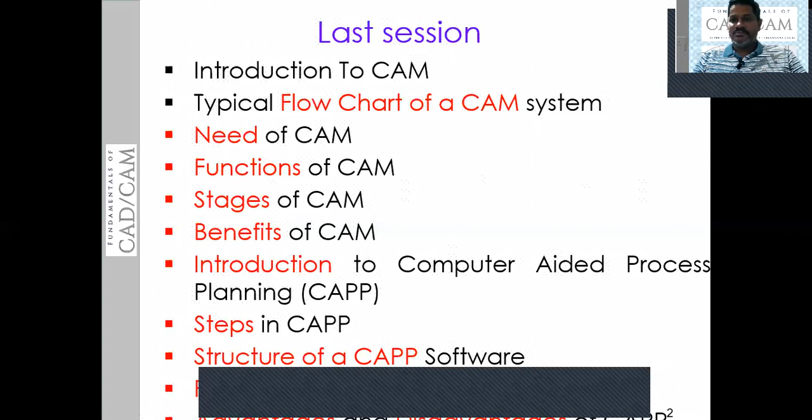In the last session, we have seen what exactly CAM is, a typical flowchart of CAM, then the need, function, stages, and benefits of CAM. Then we discussed the introduction to process planning. Then we have seen the steps and structure of computer-aided process planning software. Then we have seen the functions of computer-aided process planning. Finally, we had gone through the advantages and disadvantages of computer-aided process planning.

The objective of this slideshow is to discuss the integrated CAD/CAM organization, in which we will see the concept of CAD/CAM organization, integrated CAD/CAM organization. We will see the necessity of CAD/CAM integration in detail, point by point. Then we will move forward to see the computer integrated production system, in which we will discuss the concept, then PPC, production planning and control. Then we will discuss features and advantages of computer integrated production system.

Finally, we will discuss material requirement planning. In turn, you can call it MRP1, in which we will see the concept of MRP1, its objectives, and finally the advantages and disadvantages of MRP1.

Let us see the integrated CAD/CAM organization. This is actually a solution in which, when you integrate CAD and CAM, this solution is going to use the CAD data file as a front-end file. It is going to use the CAD data file directly where it is stored on the manufacturing side to automate the process. In turn, we can say that the CAD system is used as a front-end geometry engine to access the data to automate the manufacturing process.

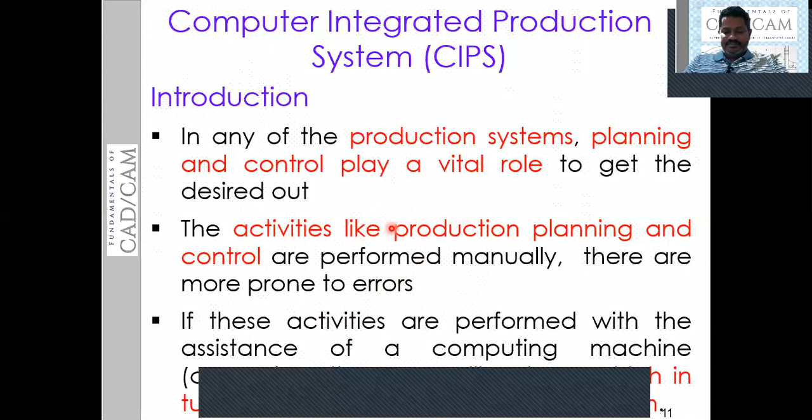When it comes to the definition of the computer integrated production system, CIPS: use of computer to integrate various functions of production planning and control, PPC, to reduce the problems faced in traditional PPC. In the case of traditional PPC, we are not going to use any computer. Every activity in industry is performed manually. That leads to many errors.

We will discuss this concept in the coming slides. As of now, try to remember, in the traditional PPC, the activities are performed manually. When the traditional PPC is connected to the computing machine, or the production planning and controlling activities are integrated to the computer, then we can call it a computer integrated production system.

Let me define this once again. Use of computer to integrate the various functions of the PPC to reduce problems faced while using traditional PPC is called computer integrated production systems. In short, you can call it CIPS.

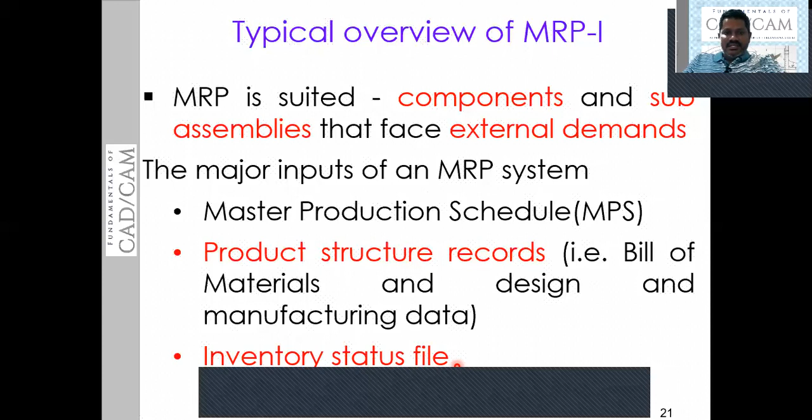The major inputs of the MRP system, as I said in the previous overview diagram, are three. One is MPS, master production schedule. The other one is product structure records: bill of materials, and design and manufacturing data. This product structure record carries the bill of materials and the design and manufacturing data. The inventory status file carries the details of the inventory. We will see a glimpse of these three in the coming slides.

When it comes to the master production schedule, this is going to plan for the individual commodities, individual sub-assemblies and sub-parts required to produce the final component. It is also going to link where, when, and how much of each product will be demanded. The master production schedule has all this information. This MPS becomes input to MRP1.

This is going to plan the individual commodities to be produced in each time period by using staffing and inventory. It is also linked to manufacturing: when to purchase, where to purchase, and how to purchase from the market.

Bill of materials, or the product structure, consists of this information. It lists the raw materials required. It lists the sub-assemblies required. It also has information such as the intermediate assemblies required. It also has information like subcomponents and the quantities of each needed to manufacture the final goods.

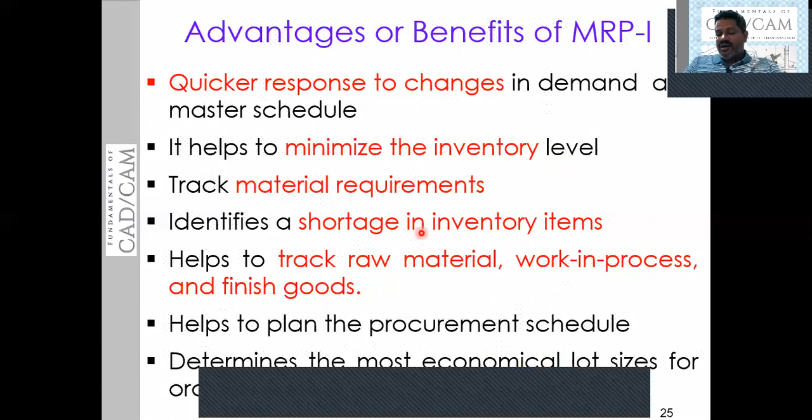MRP1 determines the most economical lot size for the order. That means MRP1 is going to determine the optimized economical quantity, or economical lot size, that needs to be ordered for the inventory to meet the demand of the market. This is also one advantage.

You have other advantages, that is, it is going to calculate the bill of material and the assemblies and sub-assemblies required. It also ensures the on-time delivery of the products, meaning the products will be delivered to the customer on time. Exact delivery dates are met with the help of MRP1. Customer service is very good and the response is very quick with the help of MRP1.

It also reduces setup, product damage, and product changeover cost, because it can quickly identify product change and setup change. So in turn, it is going to reduce the cost of the product. MRP1 also increases machine utilization, and in turn the production cost reduces. It also increases sales and reduces the sales price. The cost of the products reduces and sales increase. This is also one advantage.

When it comes to the limitations of MRP1, it does not address the financial status and the general accounting status. That means MRP1 has no link or concern with the financial side. It is not going to give us any financial data, and it is not going to receive any financial information. In turn, we can say that MRP1 is not at all linked with the financial status of the firm.

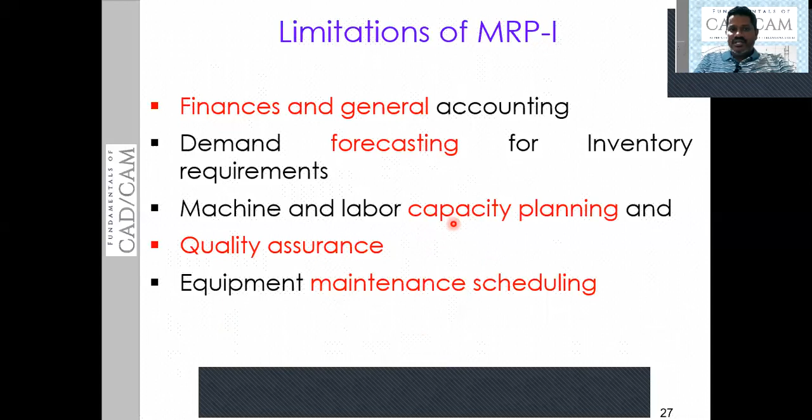Let me go back to the slides. What we have discussed as of now: the limitations of MRP1, advantages or the benefits of MRP1. We also discussed the overview of MRP1, what are the inputs and what are the outputs of MRP1.

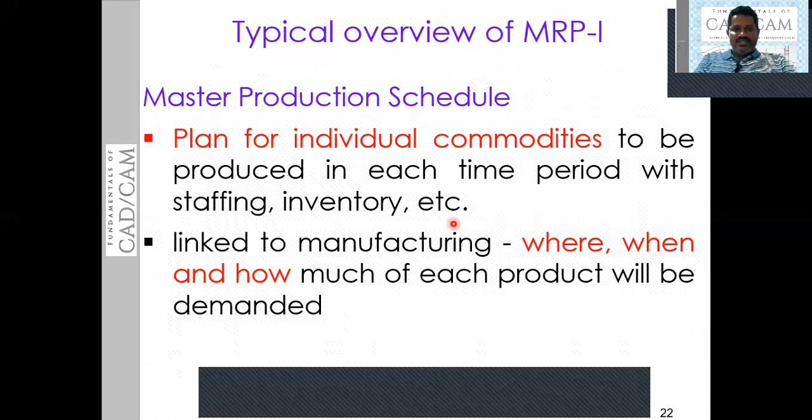As we have seen, MPS is one of the inputs to MRP1. Then bill of material is also one of the inputs to MRP1. Inventory status report is also one input to MRP1. When we give these three as inputs to MRP1, it gives us order release requirement, order rescheduling, and planned orders for the future. These three are the outputs of MRP1. It takes three inputs and it gives us three outputs.

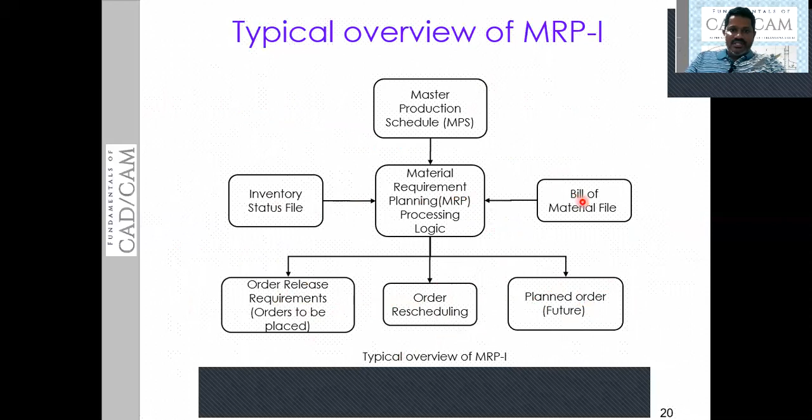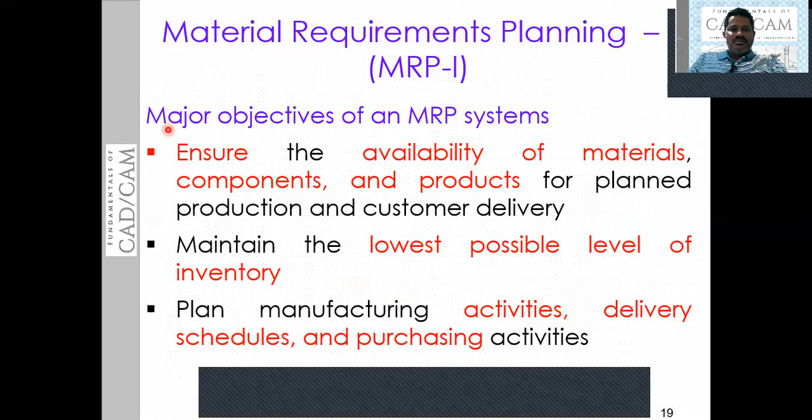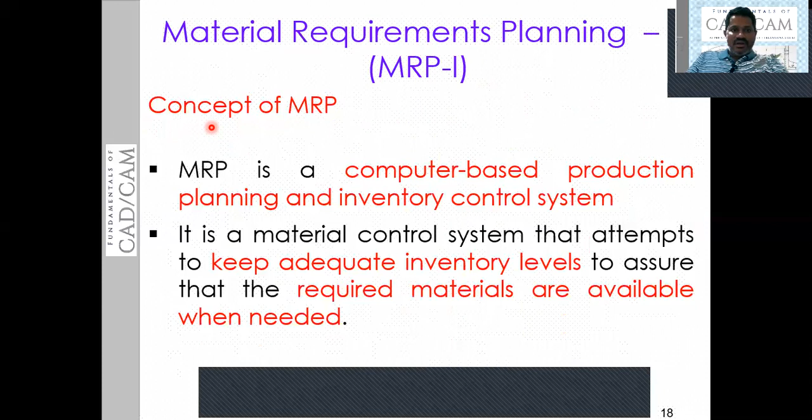Let me go back to see what we have discussed as of now. The major objectives of MRP1 also we have discussed. The concept we have seen, what exactly the concept of MRP1 is, on which concept this is going to work. We have also defined MRP1.

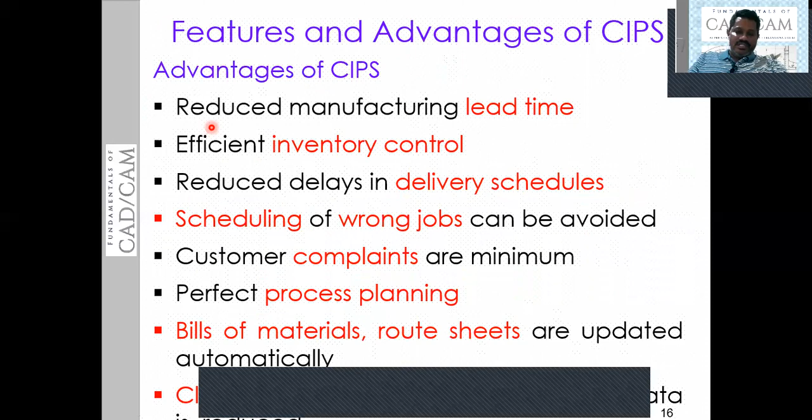We have seen the features and advantages of computer integrated production system, CIPS. We have seen advantages of CIPS, features and advantages of CIPS also we have discussed.

Then we have seen the problems with the traditional PPC, because CIPS is going to work or use the principle of PPC. The problems with the traditional PPC we have seen, and these problems can be overcome using a computing machine or a computer in computer integrated production system. When PPC is integrated with a computing machine or computer, in turn we can call that computer integrated production system.

We have some problems in PPC, traditional PPC, that is production planning and control. Traditional PPC is having some problems. Those can be overcome by using a computer. In turn, we can call that computer integrated production system, that is CIPS. So this we have discussed.

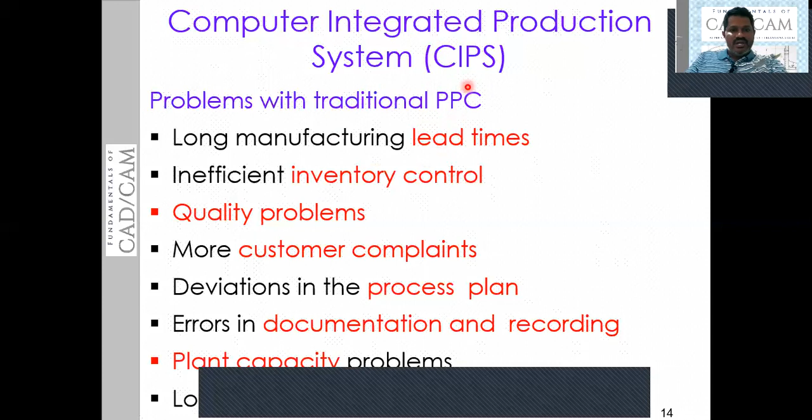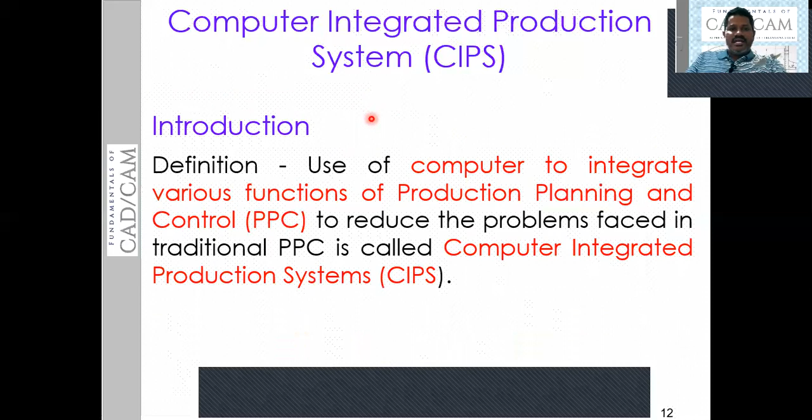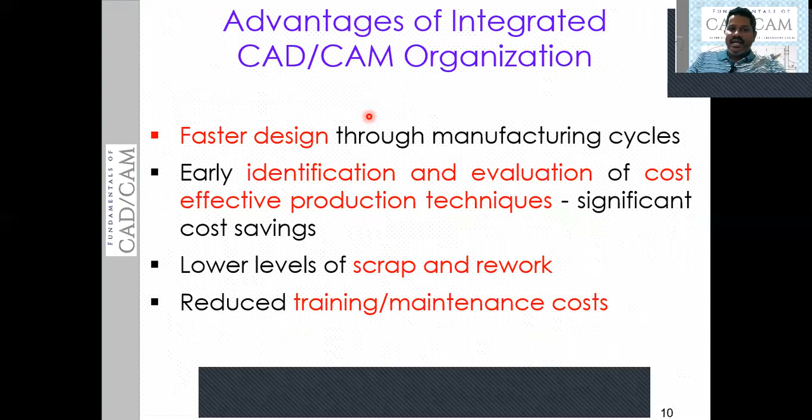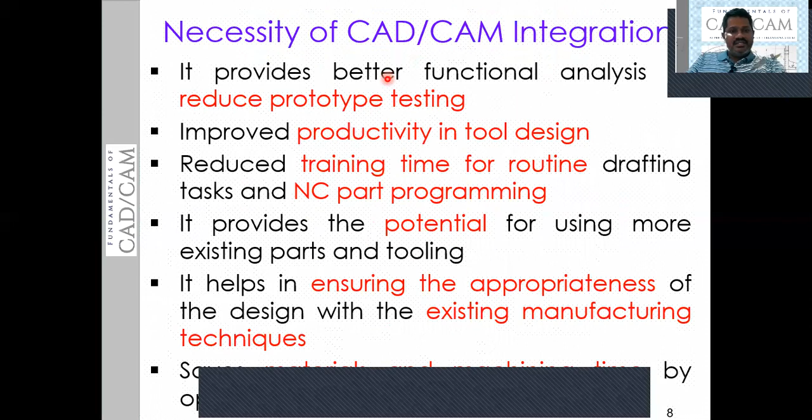Then we have seen the concept of PPC. Then we have also defined what exactly the definition of computer integrated production system is. We have seen the exact concept of CIPS. We have seen the advantages of integrated CAD-CAM organization. When you integrate CAD and CAM, the advantages we have seen in the last slide. Then we have seen the necessity of CAD-CAM integration, what exactly the need of CAD-CAM integration is.

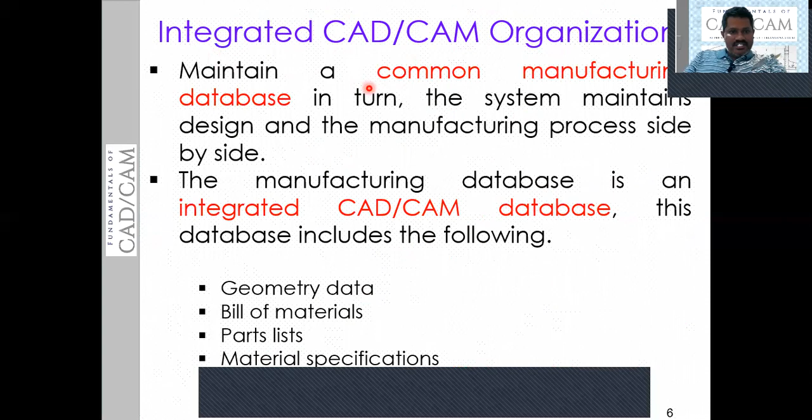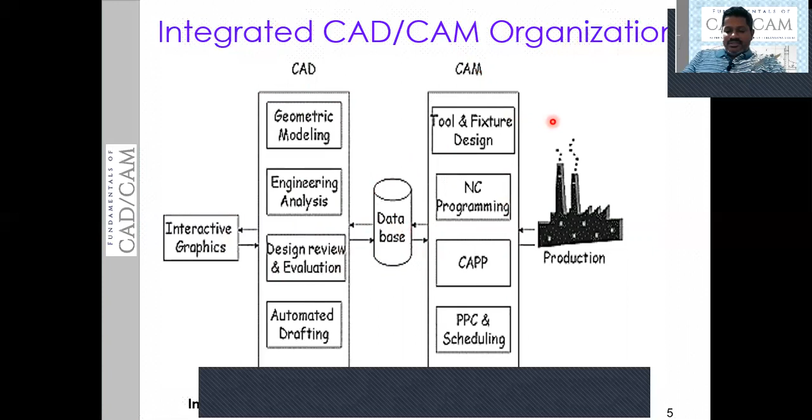Then we have seen the concept with the integrated CAD-CAM organization. Overview, integrated CAD-CAM organization layout also we have seen, what exactly happening here. CAD-CAM organization, integrated CAD-CAM organization is going to maintain a common database which will be shared by CAD and CAM, so as to enhance the flexibility of the industry.

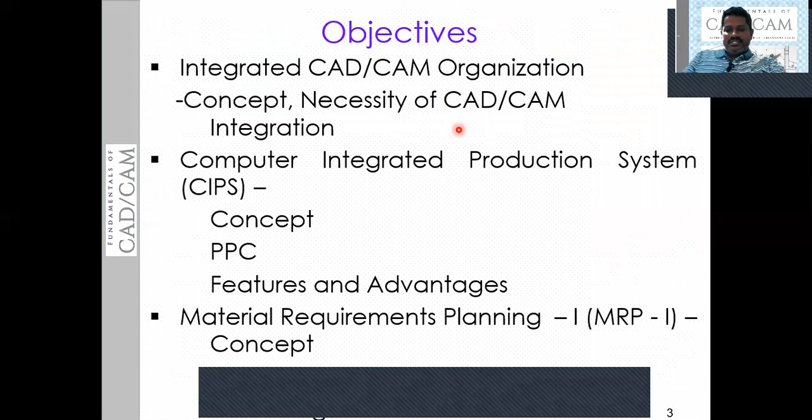So this is what we have discussed as of now in this slideshow. In the coming session, we will discuss MRP2. You have some problems in MRP1, so those problems can be addressed in MRP2. We will see this. Then we will see the advantages and applications of MRP2. We will discuss ERP and SAP. SAP is one software which is under ERP. ERP is enterprise resource planning software, under which you have SAP software.

We will see the concept of ERP. Then we will discuss the functions of ERP. We will also discuss advantages and disadvantages of ERP. Finally, we will discuss the SAP software. We will see the different types and different applications also in the next session.